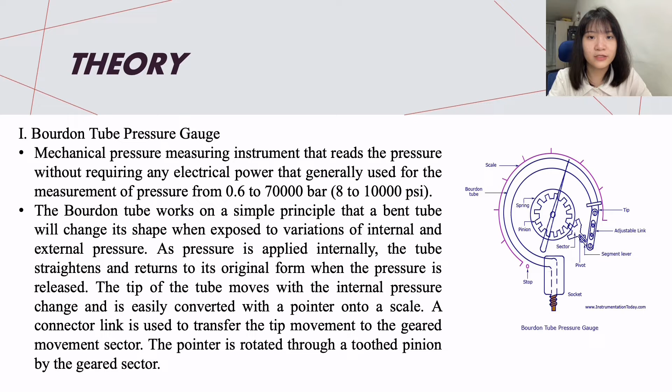The second part of the theory is the deadweight tester. It is a calibration standard that uses the principle of a pressure balance to calibrate pressure measuring instruments. Deadweight testers use calibrated weights to apply known pressures to a device under test for a simple and cost-effective solution that covers a wide range of pressure calibrations.

We put the weight on the weight stand of the deadweight tester. The weight is the reference weight, which is to be calibrated, and further we apply pressure by moving the piston. When pressure is applied, the weight will be 0.

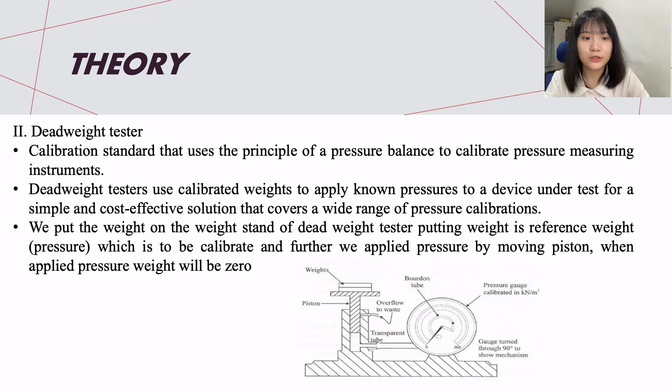The third part of the theory is the equation. We can apply Pascal's principle to our Bourdon tube pressure gauge setup, as it is also a hydraulic system, so we can calculate the theoretical value for pressure from the weight of the dead weight and the area of the piston in contact with the fluid. The equation is P equals F over A and F equals mg, where P is the theoretical pressure in the cylinder, F is the loaded weight, and A is the area of the piston.

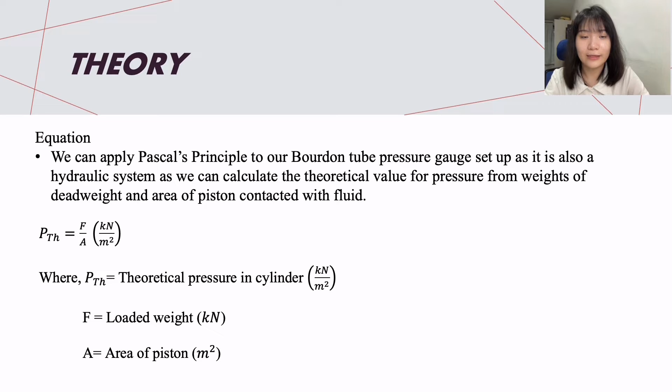So, for this experiment, laboratory 6, I will start by discussing the summary report part. First of all, the purpose, or the aim of this experiment, is to calibrate a Bourdon tube pressure gauge using dead weights. In this experiment, in order to get the gauge pressure data, we load and unload the dead weights by 0.5 kg. During this experiment, there is a caution step to get an accurate result: rotate the piston slowly in order to remove the air bubbles from the cylinder.

However, there is still some experimental error, therefore we could get the percentage error for both loading and unloading dead weights by comparing the theoretical pressure and the experimental gauge pressure. Thus, we could obtain the accuracy of the Bourdon tube pressure gauge.

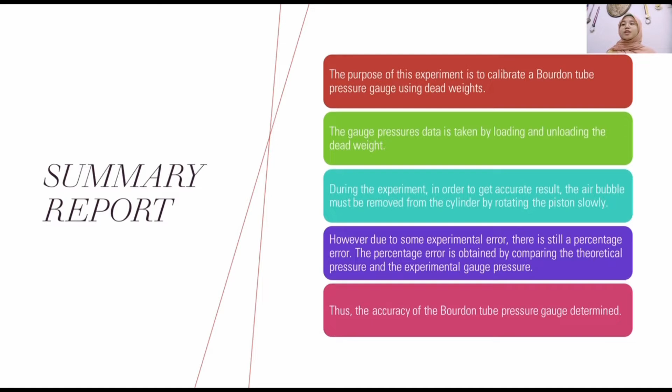Next, I'll discuss the results part. In this result, there is mass in kilograms, with the mass added by 0.5 kilogram, and the total mass. There is also the theoretical pressure and experimental pressure in kPa. For experimental pressure, there is loading dead weights and unloading dead weights.

There are 3 experiment readings to get the best experimental value, which is the average that we calculated by adding all 3 readings and dividing by 3. And lastly, we calculated the percentage error for both loading and unloading. So that is all for the results part.

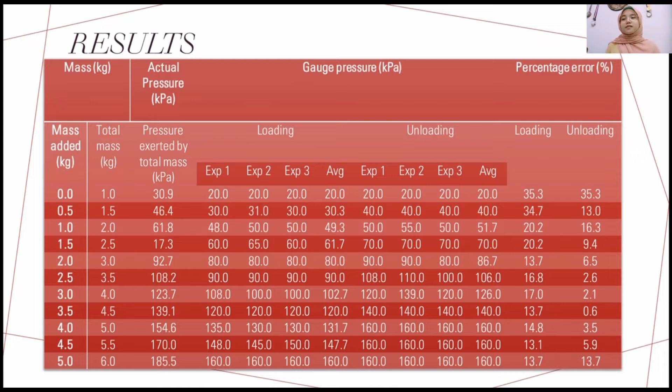My name is Kohui, and now I will continue with the discussion part, question 1, where the question is to find the percentage of the relative error for the theoretical and the measured pressure gauge. For part A, we know that the piston of known area is loaded by the known weight. Therefore, the theoretical pressure in the cylinder is equal to the known weight divided by the known area, in kN per meter square.

From the video, we have the data: the mass of the plungers and platform is 1 kg and the piston area is 3.1731 times 10 to the power of negative 4 meter square. The calibration constant is equal to the total mass in kg times 30.92, in kN per meter square. For gravity, we take it as 9.81 meter per second square.

So first, we need to find the true pressure exerted by the plungers and platform only. From the formula given, the theoretical pressure is equal to the known weight divided by the area, and we have the mass equal to 1 kg, and we need to convert it into Newtons.

So 1 times 9.81 newtons and divide by the area, where the area is 3.1731 times 10 to the power of negative 4 meter square. And we need to make sure the unit in the upside and downside is the same, so we need to divide by 1000 and we'll get 30.91 kN per meter square.

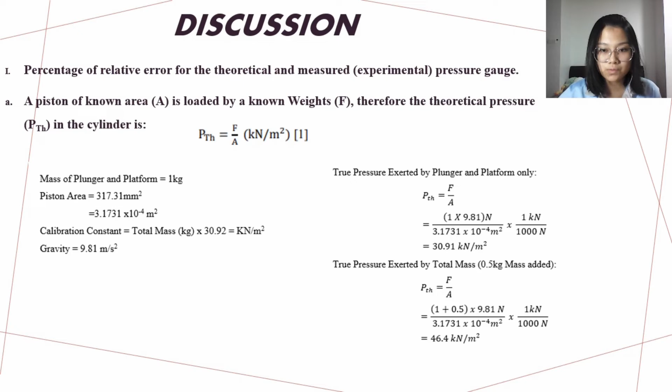And now we need to find the measured pressures that we obtained from the reading of the Bourdon tube pressure gauge. So for the 0.5 kg of the mass added, we take the average reading of the calibrated pressures for loading 1, and then we'll get 30.3 kN per meter square. And then we calculate the average reading of the calibrated pressures for unloading 1, we'll get 40 kN per meter square.

So from here, we have the theoretical value and also the measured value, and then we can find the percentage error. So for the percentage error of loading 1, the percentage error is equal to the experimental value minus the actual value, divided by the actual value, times 100%. So for loading 1, we'll get 30.3 minus 46.4, divided by 46.4, times 100%.

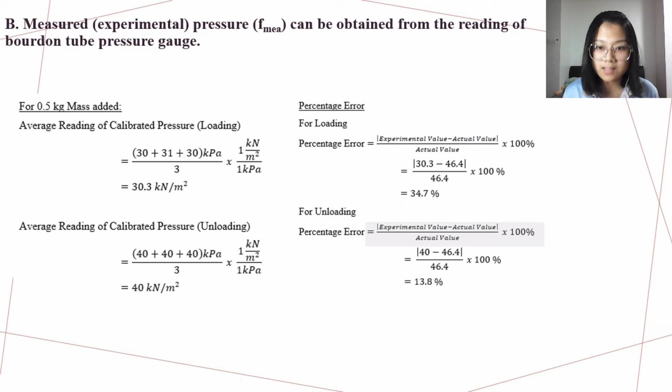We'll get 34.7% percentage error for loading 1. And for unloading 1, we'll get 13.8%. And we use the same method to find the rest of the values.

Next, I will present the second question of the discussion, which is the sources of error and methods to minimize the error. The first error is parallax error. Parallax error is one of the most common errors. This happens when the observer does not take the reading with eyes perpendicular to the scale. To avoid this error, the observer should make sure that the eyes are perpendicular with the readings, and it is encouraged to repeat the experiment a few times and take the average reading.

And the second one is the presence of air bubbles inside the tube. Air bubbles trapped inside the system cause our reading to deviate from the theoretical value. Hence, it is advised to give enough time at the beginning of the experiment, so there is sufficient time for all the trapped air bubbles to escape the system.

And the third one is friction in the deadweight calibrator. The deadweight calibrator might work slowly in changing pressure and cause friction to occur. So it is advised that the weight is loaded slowly to avoid friction.

And the last error is leakage of water from the piston cylinder system. Leakage of water from the piston cylinder system while the experiment is conducted will reduce the amount of effective pressure transferred to the Bourdon tube. To reduce this error, the experimenter is advised to make sure the apparatus is in good condition.